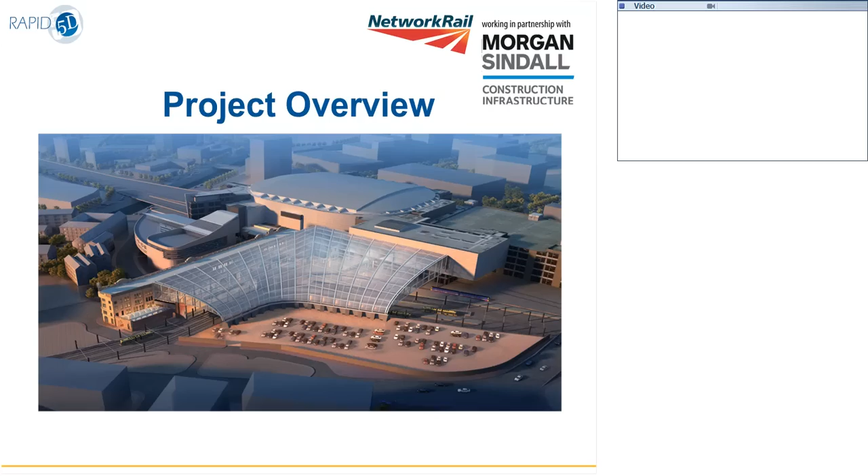However, as part of Network Rail's major infrastructure and rail expansion and electrification expansion, that's due, known as the Northern Hub, Network Rail identified that Victoria would play an elemental part of their expansion.

So they appointed Morgan Sindall to design a contemporary roof structure which would provide a bright, efficient, spacious, and above all, a safe environment, and act as a genuine focus for the new high-capacity train and tram services.

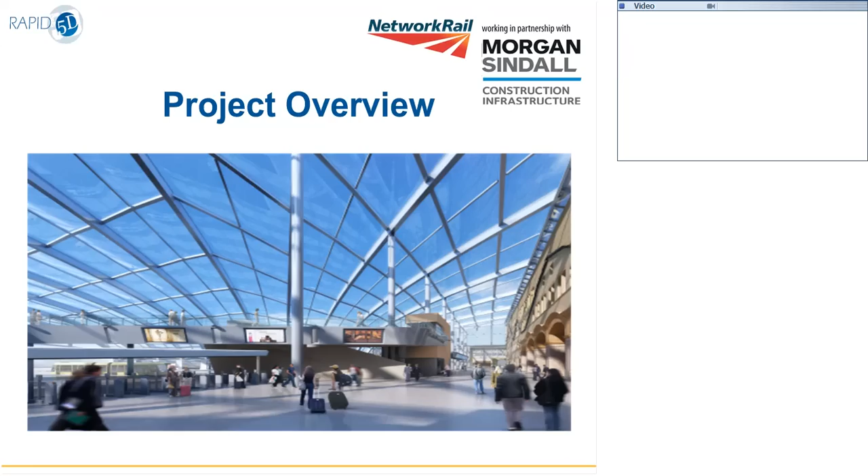And note the blue sky, it does actually happen in Manchester, but perhaps not quite as often as we would like.

So there are a number of significant elements to the project. The station building is grade 2 listed from 1904, although the train shed section was life expired and beyond repair.

And within the station's property footprint, and actually straddling platforms 3 to 6, is the Manchester Arena, which is one of the busiest event arenas in Europe, and it regularly discharges up to 10,000 people at night onto the station concourse.

Also, Transport for Greater Manchester, TfGM, have a Metrolink tram network, which has a stop within Victoria Station. As part of their own expansion plans to build a second city crossing, they required demolition of their entire infrastructure and then provision of additional platforms and complex track work.

Our challenge, therefore, was to demolish the train shed and replace it with a large, lightweight structure, which also covered the expanded tram stop, whilst maintaining normal tram operations during the day, keeping the trains running for Network Rail as normal, and of course without any restriction whatsoever to the operation of the arena.

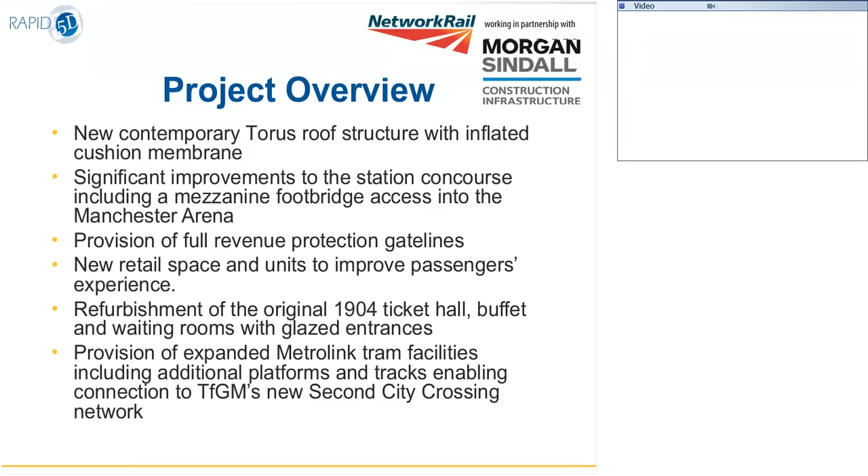So, Network Rail procured the contract by normal competitive process with an extended preferred contractor stage, during which we at Morgan Sindall assisted Network Rail prepare and submit the formal planning application to Manchester City Council, a period of roughly 12 months.

As part of this, Morgan Sindall engaged with our principal supply partners, namely Hyder Consulting as the lead multidiscipline designer, Severfield Watson for the main steelwork fabrication and installation, and BDP for architectural aspects.

At the same time, and in parallel to the progress of this contract, Morgan Sindall had been for some time evaluating the advantages of linking 3D design modelling with scheduling, which is 4D, and cost, which is 5D. That's really for our delivery process, and we've been working with Rapid 5D to assess the VICO collaboration model.

In early discussions with Network Rail, we both agreed that Victoria would be an ideal project to conduct a live assessment. By running the assessment alongside the conventional process, we would both have the opportunity to evaluate without risk or detriment to what would be a very high profile and challenging process. What we certainly didn't want to do was distract the project team from their day job.

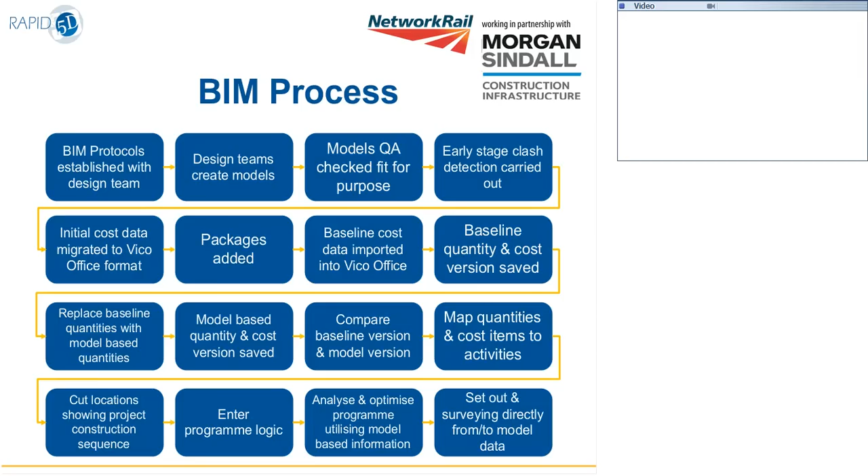So what was the purpose of this process? We were looking to enhance capabilities using this process and compare it to what we do traditionally. We were hoping to get better and more effective collaboration.

We needed to check interoperability. As John's mentioned, we were already using several different softwares from several different developers. We needed to check we could get the data together, and the data became key. We also need to look at the infrastructure specialities of Manchester Victoria Station. There are some building elements to the work. There's also some civil engineering aspects, but we have one consistent set of data for the entire project, so we needed to be able to bring everything together.

We also needed to do it transparently. Network Rail were very interested in what we were doing. We needed to be able to show where particular numbers had come from and track it back to the original source with confidence. That also led to a potential improvement in how we transfer data, how we communicate with different people in the supply chain and our clients. And as I said, we also wanted to look at maybe getting BIM out of the office, out of the site office even, and actually out onto the field.

So in terms of collaboration, we were talking about aspects of design, time, cost, taking things out to the field. We were involving a lot of different parties here, and their information was coming from a lot of different sources. One of the key factors we found was that if all the stakeholders could bring all their data together into one central pot, it reduced double working, it reduced the amount of times we were having to move data between solutions, and there was no need to reconcile varying data at different stage gates or between different disciplines.

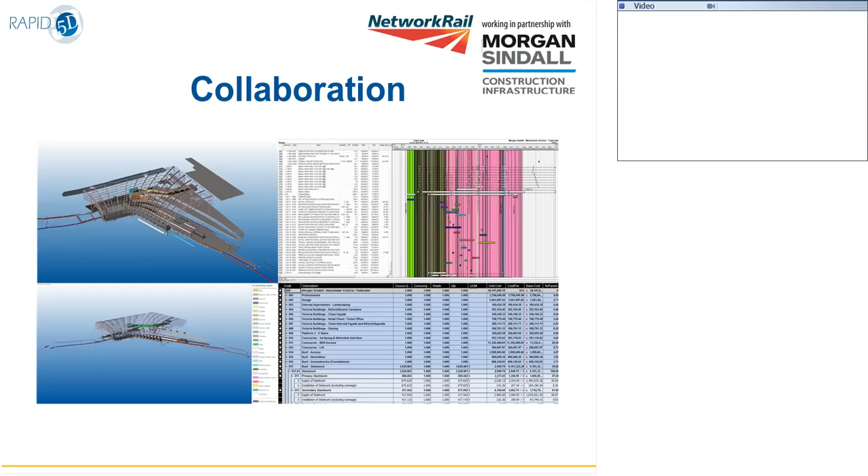In terms of interoperability, we have several different solutions that were in use on the project for the designers and the steel fabricator. One thing we didn't want to do was specify which solution they used. So the reason for that, we don't want to tie one hand behind their back. They pick their solutions for a particular reason, and that's because it's best for what they need to do and their design work. One of the reasons Morgan Sindall came to Rapid 5D and we advised to use Vico Office

was that it was capable of reading several different formats, and in the case of this project, we used Bentley MicroStation, Revit, and Tekla Structures as well. But by bringing them into this neutral environment, it meant everybody could access them. We could see all those different solutions working together at the same time without any of the interoperability issues. The way Vico Office communicated using specialist publishers also meant that we could ensure that the data that came across maintained its integrity and we didn't lose any information in the process.

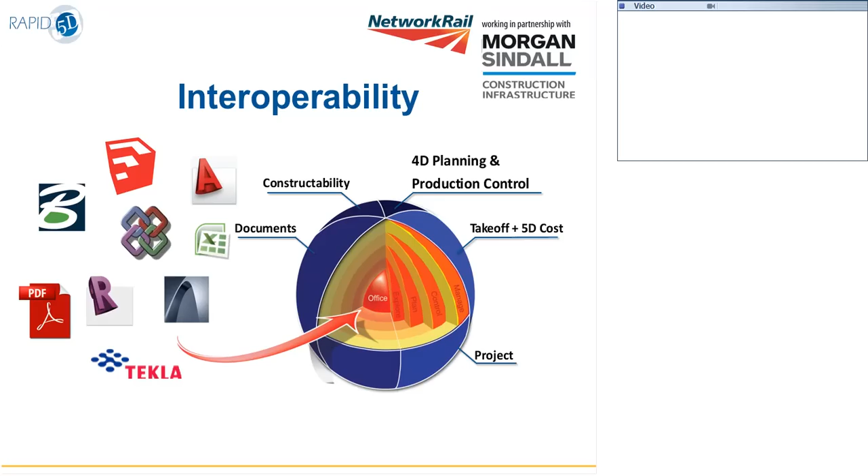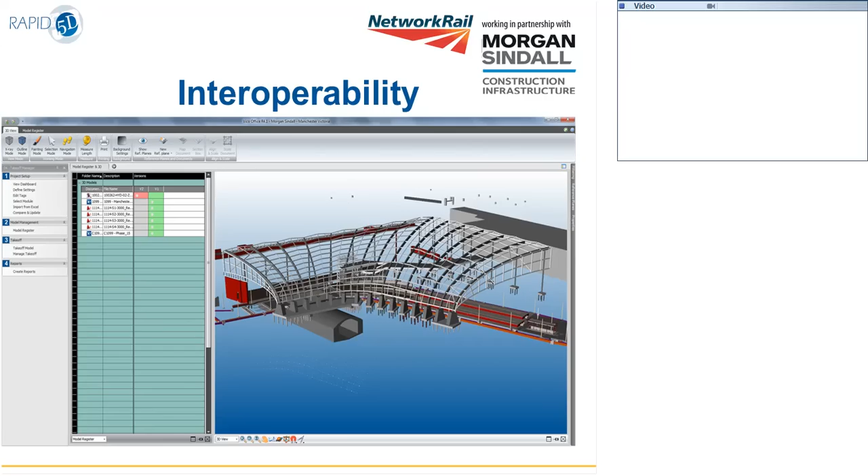And as you can see from the left-hand side, we have several different modeling solutions in here. The Revit is the little purple R, Tekla is the little blue symbols, and then the little red symbols. Actually, we took initially on this project the Bentley information into a DWG format and then imported that into Vico Office. As we moved through this project, working with Trimble, we were able to produce a Bentley publisher, which is now standard, which meant we could get even better data directly out of Bentley into the project.

Some of the data that exists on construction projects isn't currently in the realm of 3D. There's not a problem with that. We need drawings that show specific details, things like geotextile grid, drainage details, things like this. It would be very time consuming to model these. Would we get enough bang for our buck if we did? Probably not. But without reviewing that additional information, we can't arrive at accurate prices, accurate durations, and we don't have all the information for the project.

So it became necessary to integrate both the 2D and 3D data together and also tie it together with alphanumeric data, things like the specification, the estimate, the schedule, which don't exist in the model world until you actually link them to the model. So to give this complete picture, we started to actually place 2D documentation into the 3D model, and this also enabled us to check that the model was matching the contracted drawings. Since this model was being done as a collaborative exercise, it didn't form part of the contract, so we needed to gain some confidence in it.

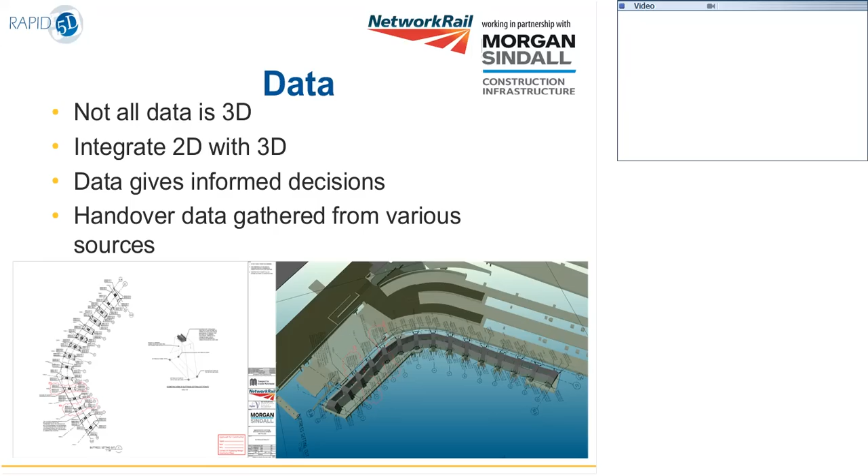This also enabled us to start to build data together in one place, which can start to lead to data handover for Network Rail, either attached to the model or potentially one of the future steps we might be looking at is a basic COBie output for them to meet the requirements. But unless we put all the data together, we aren't able to do that. So the interoperability for the data became very, very important as well.

I've mentioned infrastructure specialities. There are very different techniques that are both being used in the same place on the same project at Manchester Victoria. The items that are for the tram network for Transport for Greater Manchester are very linear, very traditional civil engineering techniques. They use things like time chainage programs. Everything is broken down by location.

But when we begin to look at the structure of the roof and the more building type element, especially the mezzanine underneath the roof, which is going to contain the shops and an access way to the MEN arena, that's not dealt with in the same way. It's dealt with very much in a traditional method of constructing different parts of the project. We needed a way to normalize this data and deal with it in the same way.

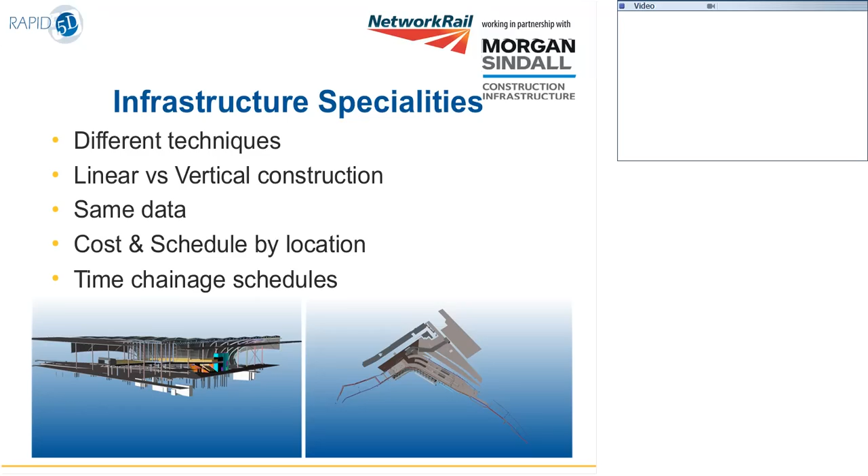So how this was tackled was using the location tool in Vico Office to apply that to the cost and schedule, which meant we could actually deal with the building elements in the similar way that we dealt with the time chainage schedules, but still satisfy the building requirements and the project team for what they needed to get out of it. So by using a model, we were able to visualize those building locations by zone, by floor. And again, this has an output moving towards handover in where assets actually belong.

By having both quantity and cost by location, it's possible to see where the value is spread throughout the project. This can also be coupled with an asset-based bill of quantities, so we can actually start to use data for cost benchmarking as well. And that asset-based structure also means we can start to hand over information from the project delivery team to Network Rail in a systematic and logical way. It's also improved the traceability and how we can track information throughout the project.

And one of the big changes we made for transparency in comparison to the traditional process was we moved to an asset-based bill of quantities. So now we have an object that has to be constructed, we have the methods of its construction identified against it, and then the resources that feed those methods of construction. So underneath each asset, I can see how it's been built and what's been used to build it. So we can actually start to use that information in the future.

This also gave ease of use. If I'm looking for the information about the model-based object, I can select it and I can actually see what it's associated with. And that also meant that it gave suitability for the project delivery team. They could start to get to grips with this fairly easily with a small amount of training.

So with that transparency, we've picked on a nice simple example here. We've selected the primary steelwork, which are the ribs for the roof. On the left-hand side in our cost data structure, which is asset-based, I'm looking at steelwork and I'm looking at those primary ribs in that structure. On the right-hand side, you can see them highlighted in yellow on the model. And then on the bottom right, what you can see is that object identified and then the quantities that have been derived for that object to feed the cost plan and the bill of quantities.

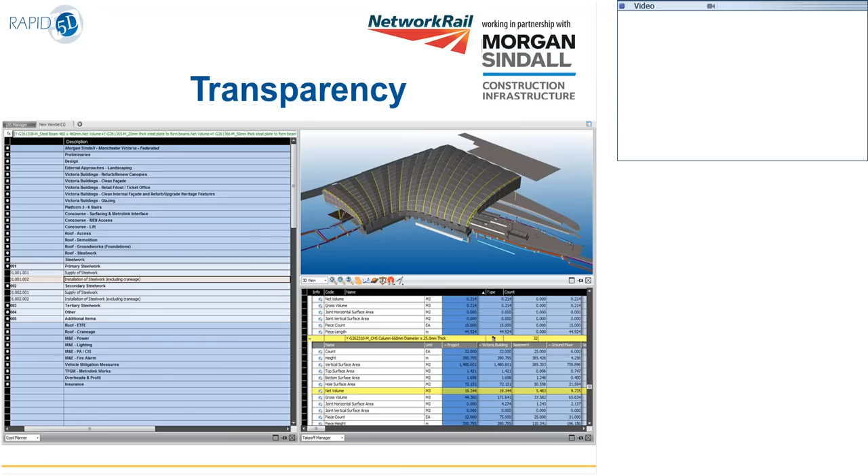So very transparent, very easy to see. No need for a lot of spreadsheets or things like that or codes to track all this stuff. So this enabled the team to see where stuff was coming from. Another thing we started to improve as well was communication. Data based around a 3D visual representation is extremely powerful. A picture says 1,000 words. It gives us real-world understanding of things, and it actually enables non-technical engagement.

A good example of this is the reinforcement. So the buttress walls that support the roof are extremely large concrete structures, but they take a very high load as well. So the roof doesn't actually load the grade 2 structure of the station itself. The rebar inside these is extremely complex to take those loads, and it also has to interface with some excessively large holding down bolts for the steelwork. One of the key things was to make sure these items were coordinated and perform clash detection on this. So we actually modeled up the reinforcement using Tekla Structures, and were able to check that the holding down bolts weren't going to clash with any of the reinforcement.

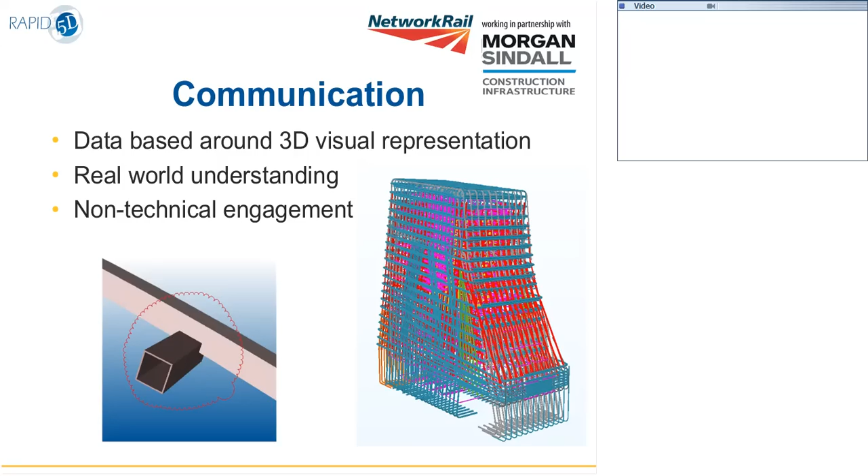So when the guys were putting the reinforcement in place on site, we could also check things were going in the right place. But visually, what you see on the screen there, in each case for each buttress, is represented between 19 and 24 different drawings for each buttress. To be able to see all that information in a 3D visualization is quite different to trying to look at 2D drawings.

We also took BIM out of the office, out into the field using some Trimble hardware, total stations and a connected rugged PC tablet. This integrated instrumentation enables us to take the whole model out to site, so the whole model is actually held on the tablet, and that enables us to track changes and deviations. People are able to select setting out coordinates on the model and then actually directly set them out in the field without having to go back and carry out any calculation.

It also enables us to identify and address issues early. We can survey points, compare them against the model, and decide whether they're in tolerance or not. This is all done in an automated fashion without having to get a calculator or a count pad out and do it by hand. That actually enables us to minimize calculation errors and actually get through things a bit quicker. One of the nice statistics we have is that the engineer who worked with this piece of equipment managed to survey 360 points in 6 hours, which is pretty impressive by any standard.

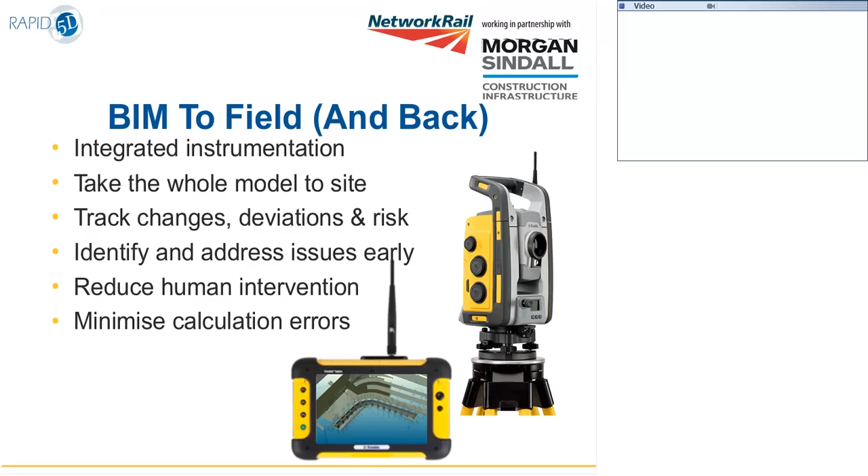The BIM to field and back also started to come to fruition. You can see the model from the 4D simulation on the left-hand side, and you can see the same stage gate on the right-hand side with a picture taken from site. Now, one of the things we found was it gave both Network Rail and the project team more confidence in the model as time progressed, because obviously we were running in parallel with the traditional process, and there was a bit of an experimental sort of air to things initially. As they started to see project delivery match what the model was saying, the team started to actually gain some confidence in that.

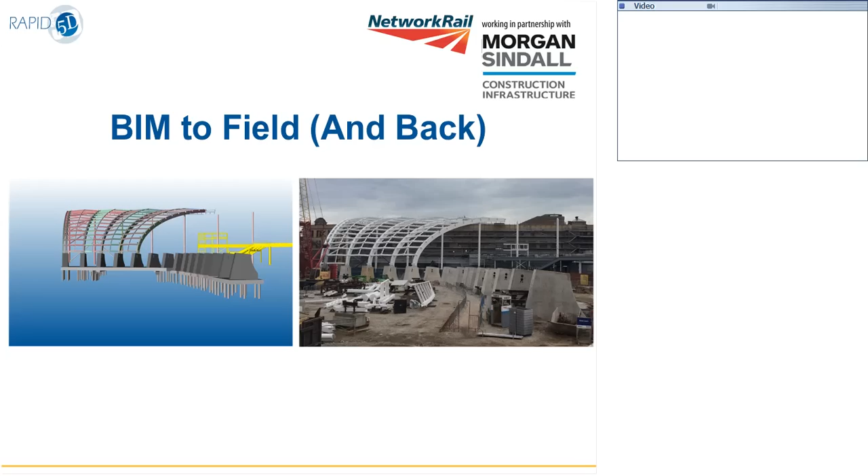I'm going to hand you guys back to John now, who's going to talk you over a little video we've got showing some of the actual works. So I'll just pass you back to John.

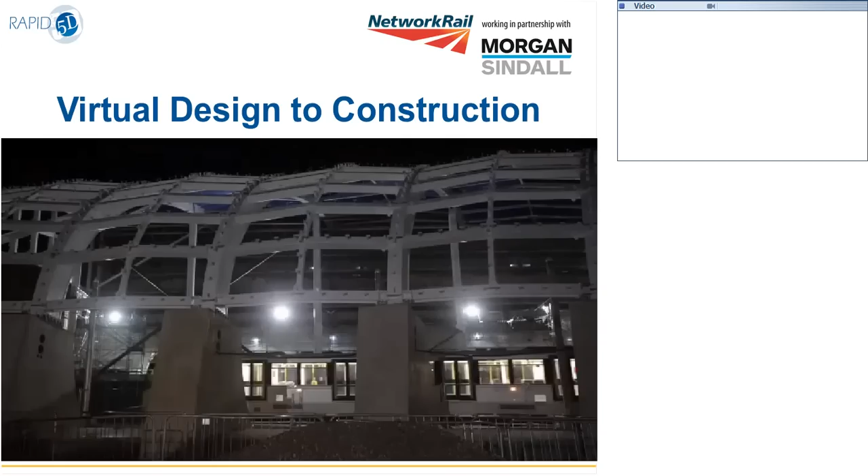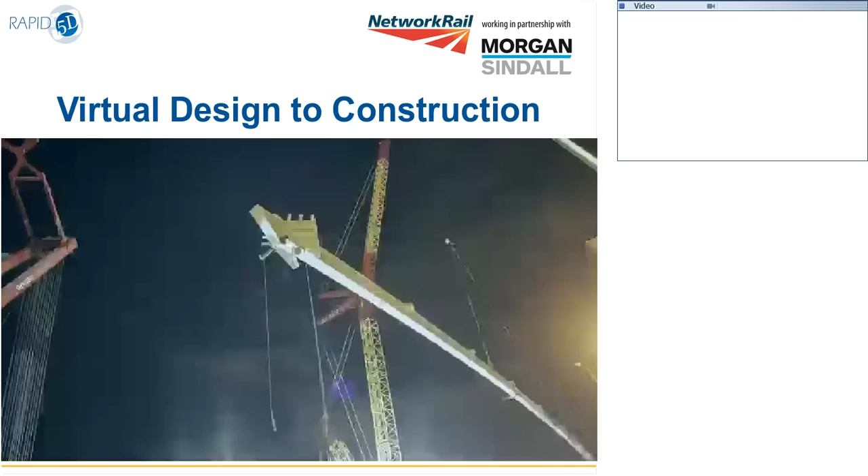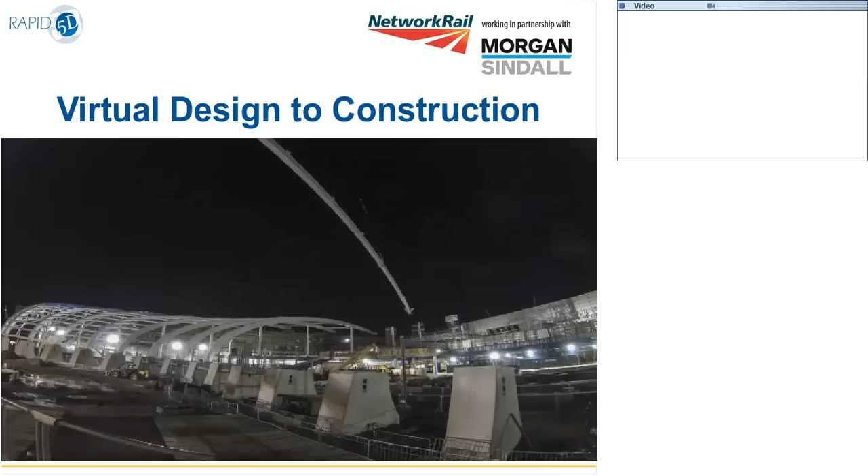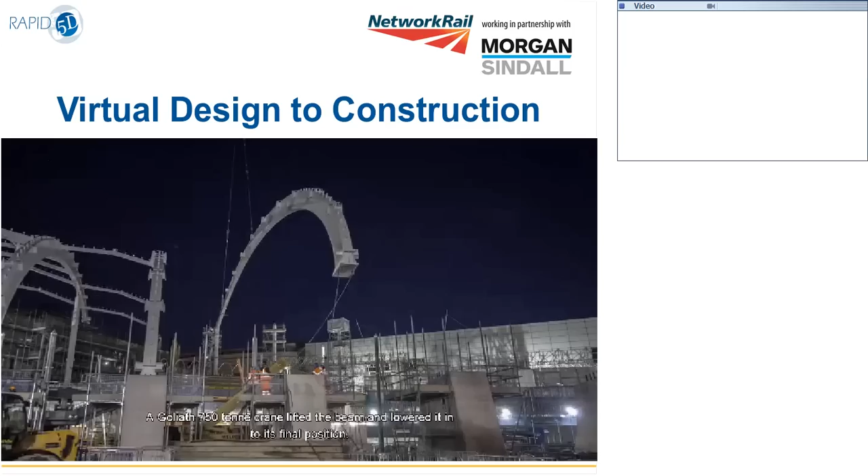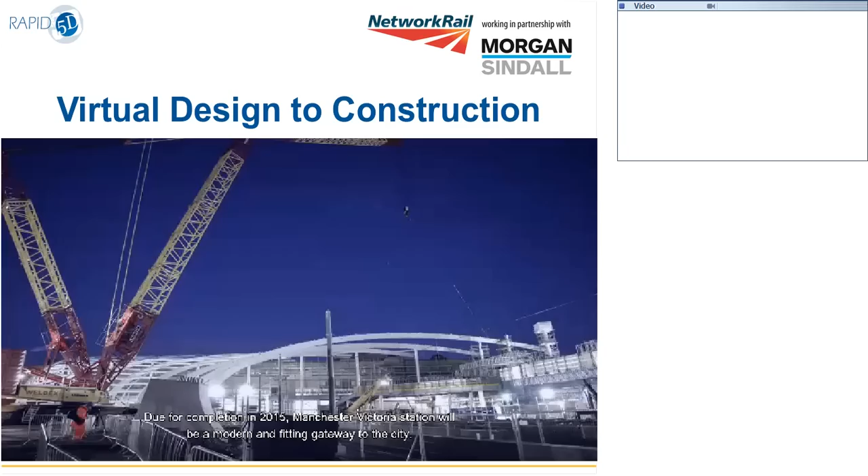Unfortunately for us, the only possession over the tramworks was at night, and it was a 3-hour slot. So in actual fact, the first 3 hours of the lift were prior to the tram possession, where the crane took the weight, allowed the camber to take effect, and then as soon as we were granted the isolation and possession, the crane was allowed to turn, and we had 3 hours to place and locate and secure that rib. And there's the light, as it was an early summer job.

So it wasn't quite as easy as the video shows, but nonetheless, it was really quite an effective and efficient method of installation. And I think what we would really like to emphasize is that with the model and using the model, we satisfied ourselves prior to the erection of any of the steel that all the various individual models, whether they be the Revit model from Hyder or the detailed connection one from Severfield Watson, were all federated and landed in the right place. So the first time a piece of steel landed, it was accurate.

There was no sledgehammer required. There was no classic gas axe required, and everything slipped into place, and there were no possession overruns or difficulties for Network Rail or for the tramworks.